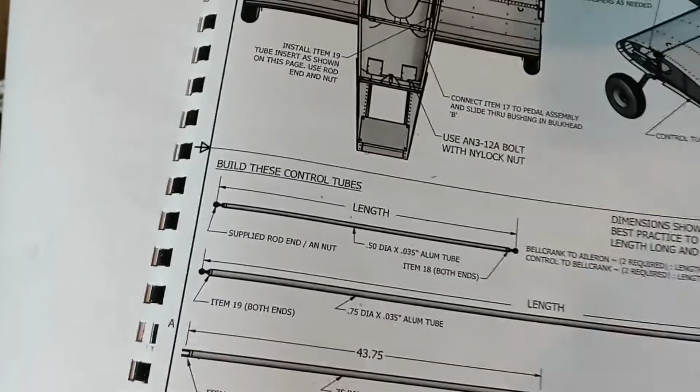Okay, on the plans here it says from the stick to the bell crank, the push rod will measure 43 3/4 inches. That's from the center of the bolt hole to the other center of the bolt hole, or center of your rod end to center of the rod end where the bolt goes in.

So what I did was put a piece of tape on the floor at 43 3/4, going over to another piece of tape on the floor, and that'll be my measurement.

We'll show you how that goes, but right now I'm going to cut the end of the tubing, or square the end of the tubing with my lathe. Since I got one, I might as well use it.

So all I'm doing is squaring off the end of this tubing so it'll be nice and square for the rod end bushing to go in there. Of course, you guys are probably better at cutting the tubing off square with a hacksaw or something than what I would be.

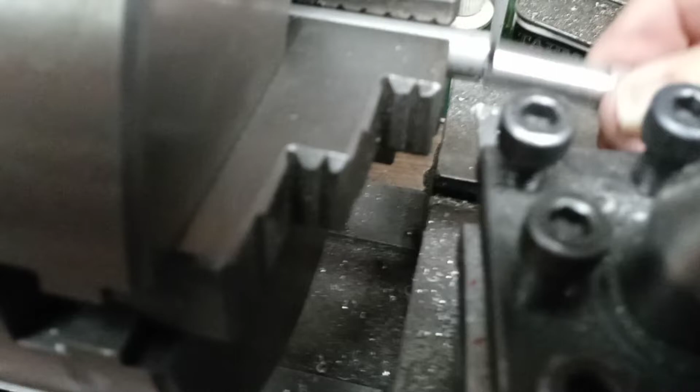So that's squared off, and then I take this and deburr the inside just a little bit, and take a file and deburr the outside. There we go, nice and straight for the rod end bushing and the rod end to go in.

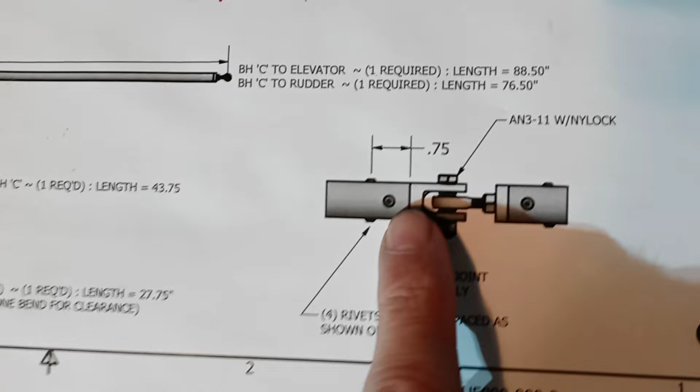Got that part. So now, as per the manual, it says 4 rivets. Of course, they only showed 3 because there's one on the other side you can't see. But it shows don't go down more than 3/4 of an inch so that you don't get out the end of that.

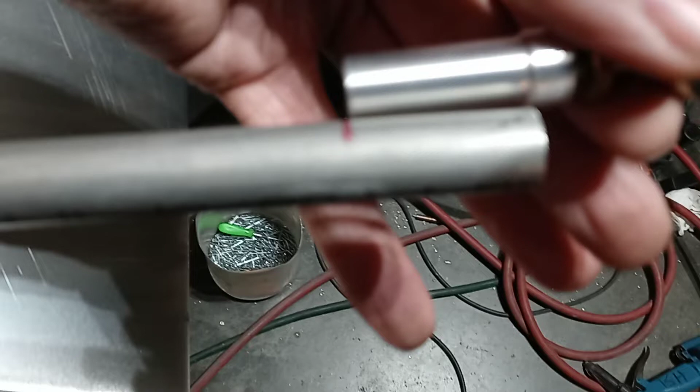So you don't miss the end of the rod end bushing. What I do is take that and mark the end of it, like that, so I know where the end of the bushing will be.

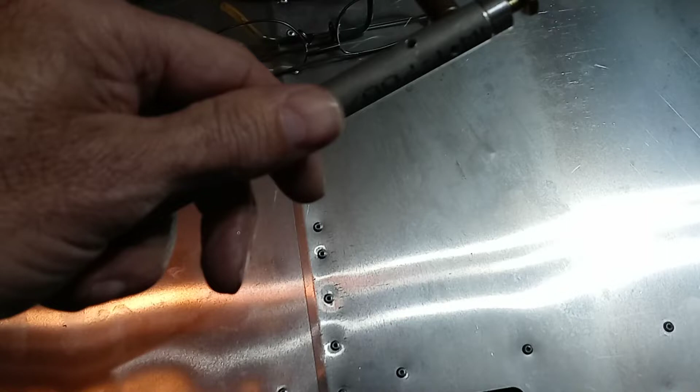Oops, sorry, I thought I shut it off. Well, left it in the dark for a while.

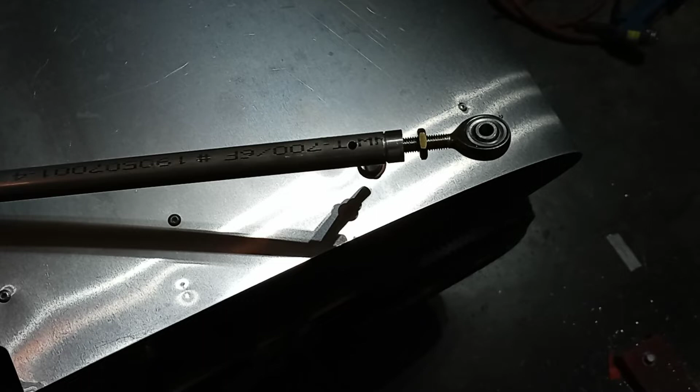Well, anyway, I got the other holes drilled. So now I'll take the cleco out and pull the rod end bushing out of there so I can deburr it, and then we'll go back together.

Okay, now it's back together. Just shoot some rivets in it. Okay, there we go, rivets in there. Now then, to do the other end.

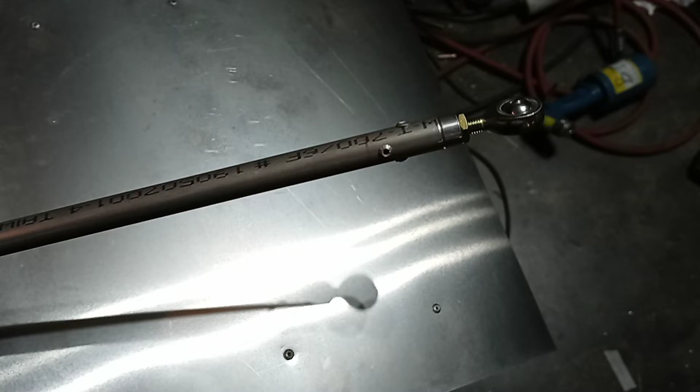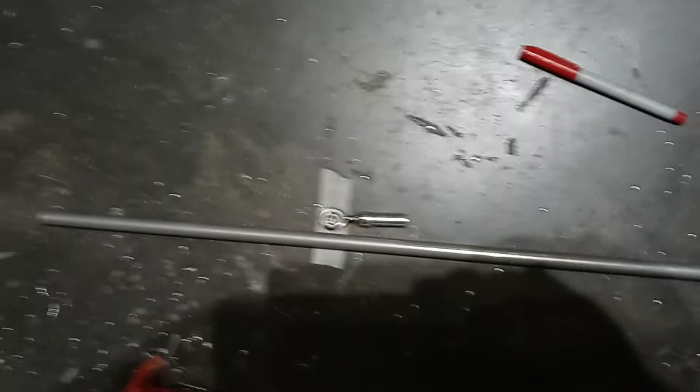Okay, so what I do is get that heim joint lined up with the center of the hole with your line. You don't have to be that precise because you can still adjust the heim joints.

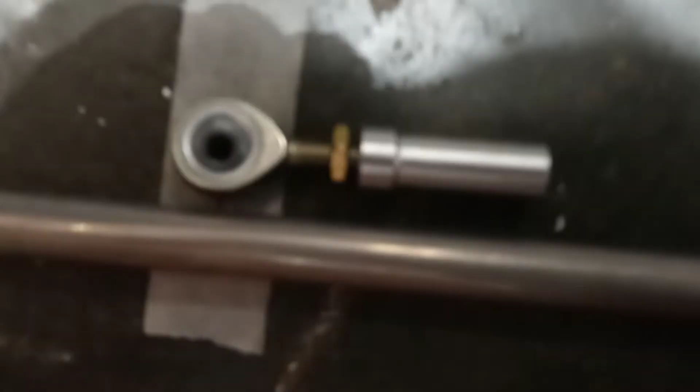And then on this end, get that aligned, and then where the shoulder is, mark it on the tube. Let's see if I can... I don't know if I can do that and hold this and watch and all that stuff. Let's see. There we go.

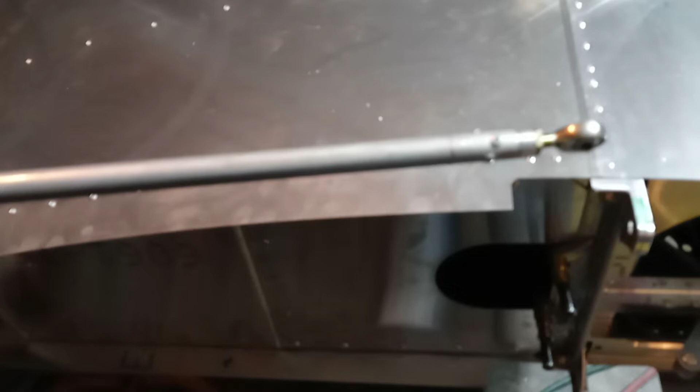Okay, so got a line there. So chop that off, square up that end, and rivet that in, and then I'll show you. Okay, there we go. And of course, pulled it apart with my clocking line on there and deburred it, then put it back together, riveted, and there we go.

And then now the end that goes to the stick has its own special heim joint. I don't know if you can tell, but it's flatter there than this end. The ball sticks out further. I think you can see that. The ball sticks out further.

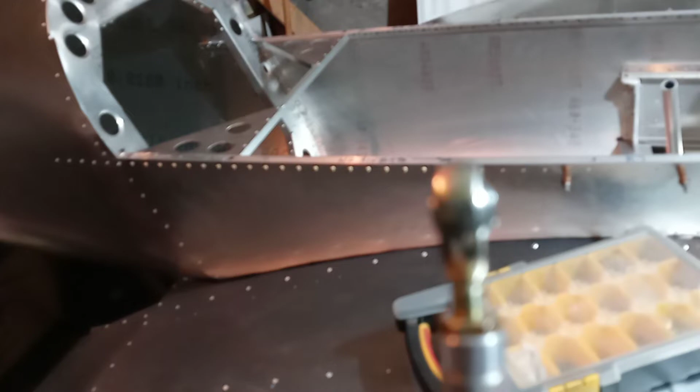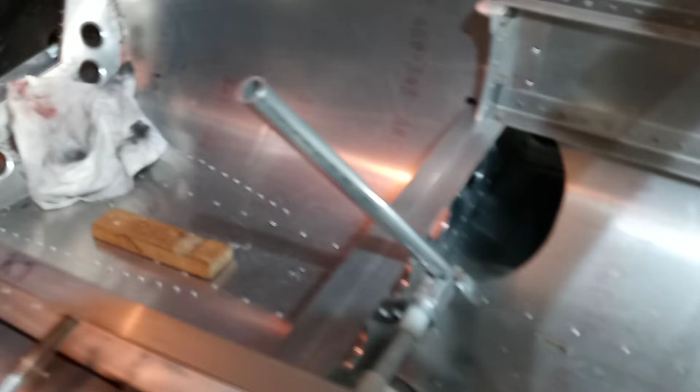And that's because when you get it in there on the stick, it's so nice that you can just reach right through there and do that instead of having to get in the cockpit and bend around there without the cockpit skin there in a way. So you get this in there and hang on.

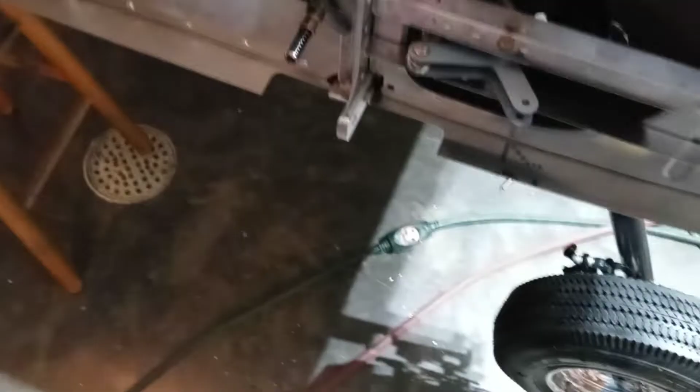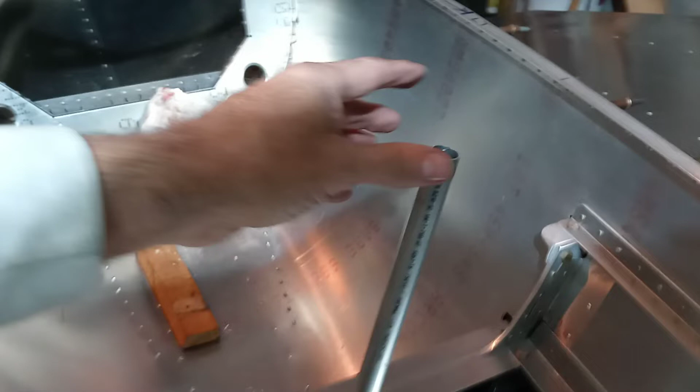And then hook it at the bell crank end and on the stick. And then when your stick is in neutral, the stick's in neutral.

Okay, this here bell crank should be 90 degrees to the rib. That's the neutral position of the bell crank with the stick in neutral, which is not in neutral back and forth, but it can do that. That's pretty close. So anyway, that's where the bell crank should be when the stick's in neutral.

Okay, so there's something else I wanted to say. I got another guy from California coming to meet me here. He said in February. I guess he grew up or is from Wisconsin, either Wisconsin or Michigan, I think he said Wisconsin. And he's going to go back to there, but on his way there, he's going to stop here sometime in February. So I get to meet another California subscriber. I know I've got him, I think his name, I'd have to look up his name, I think it was Paul. And he was working on a Hummingbird, which, of course, that's what California Mike's got, is a Hummingbird. But I know I talked to this Paul at Oshkosh last year, and he talked with Terry too, and Matt, but now he's just very interested in getting or building a scratch built ultra cruiser.